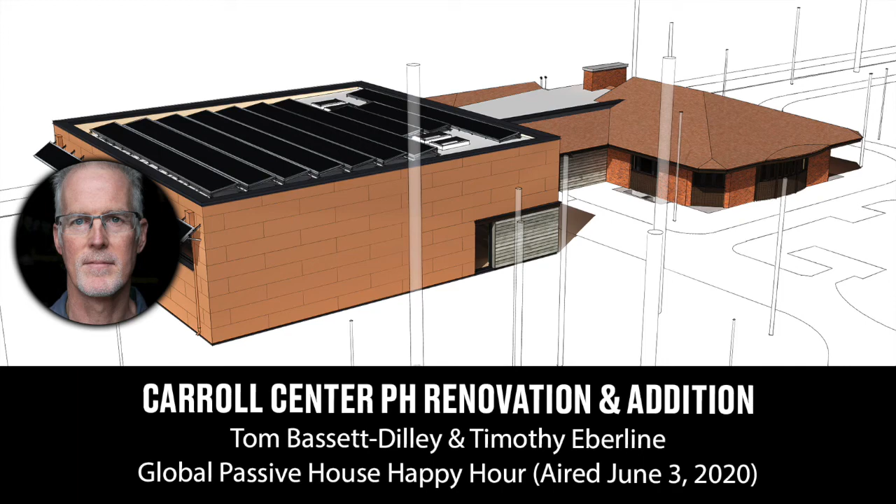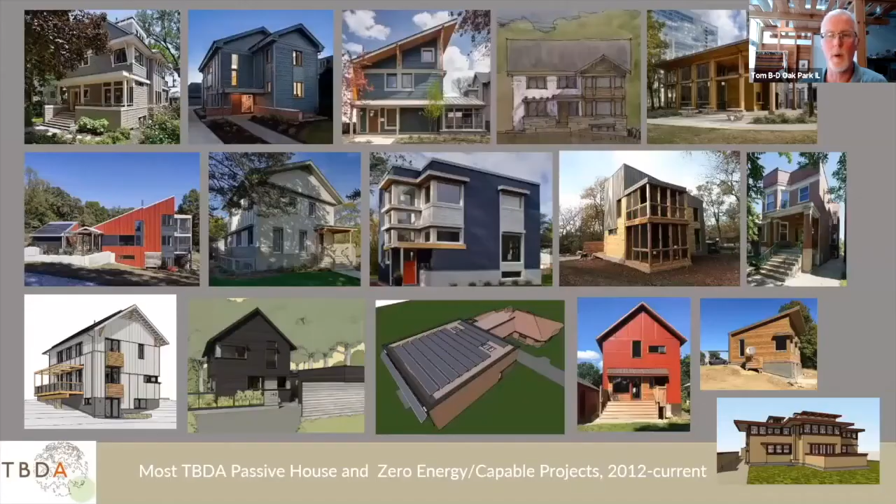So anyway, yeah, this is our kind of 2030 for 2019. We're really excited by this. We're inspired by it, and fortunately, we have clients who come to us asking for it. As a 6-person firm, it's our focus. It's what we live and breathe.

This is just a snapshot of some of our net zero and passive house projects in the last 8 years or so. The bottom right corner is one we're really excited about, which is just coming on board, a retrofit of a Frank Lloyd Wright house here in Oak Park.

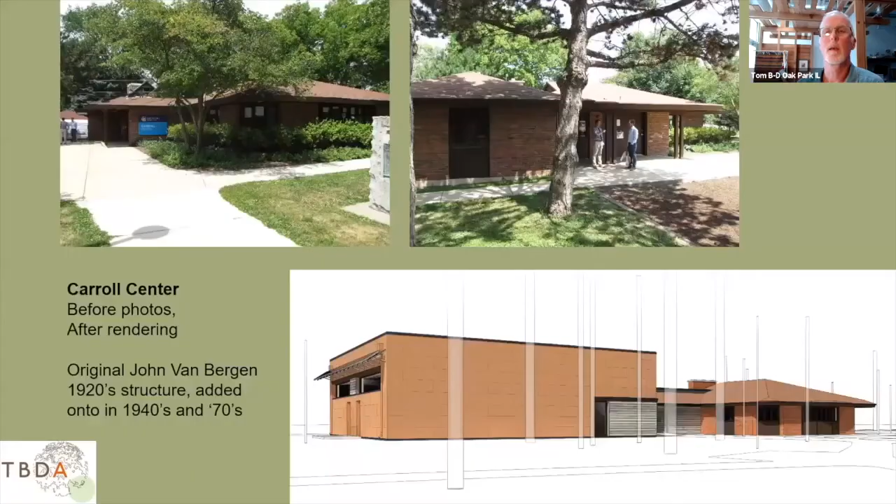So the Carroll Center is a community center in Oak Park. It's a little building that was originally built in the 1920s, designed by John Van Bergen, who was a Frank Lloyd Wright employee, and then went out on his own and did Prairie School buildings. Then it was added on to in the 40s and the 70s, so there's kind of a mishmash of things that we were coming into.

The rendering in the lower right shows the big addition off on the left there, which is our project. The owner started by saying, listen, we need an addition here, and we want to keep the budget down. So we designed a down and dirty addition, got the bid, and then they took it to the board, and the board said, yeah, but can't we do better?

Because we had done a project for the Park District 4 years before that's a near net zero project that the community loves and the board is proud of, we got together with the Park District again and said, hey, the Illinois Clean Energy Community Foundation grant might be the ticket here.

This is a pretty amazing incentive program we have in Illinois, because ComEd, the big utility, sold a power plant and had something like $225 million that had to go back to the public. So they did it via this endowment that funds more energy efficient design.

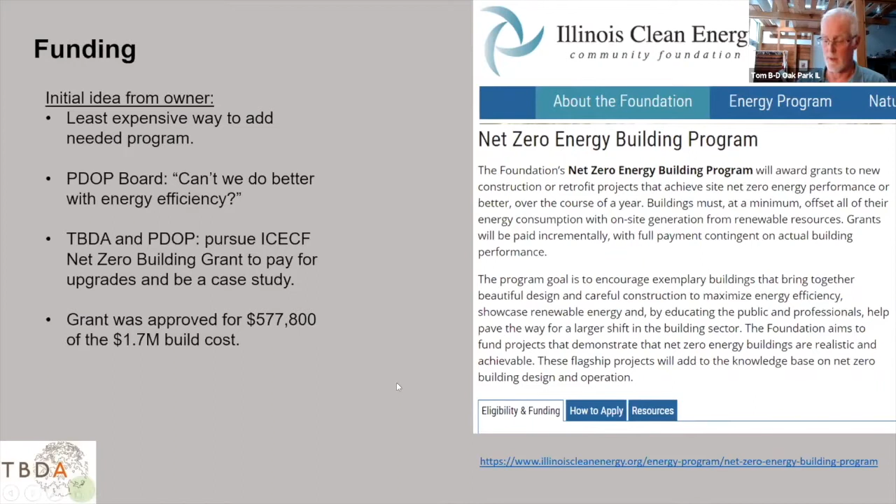So anyway, that was a big deal. This is a quick orientation here. On the top is the existing zone of the plan, and on the bottom with the black poché is the new section.

Oak Park has got more young families moving in. There's more kids. We need more after-school programming space, and we need more daycare space. The Park District wanted a big room where the entire staff could meet, because they don't have any facility big enough to have their entire staff. That's what this big addition was about. That's why the ceilings are as tall as they are, because they have kids in there running around throwing balls and stuff after school, and that's why there aren't a lot of windows down low.

And then there's a movable partition down the middle so they can divide it up in the day for daycare.

So the total ICFA for the project, the conditioned floor area per PHIUS, is 7,667 square feet. But the envelope to ICFA ratio is about 2.7. It's kind of a sprawling building, so that's a little challenging in terms of energy modeling, as we know.

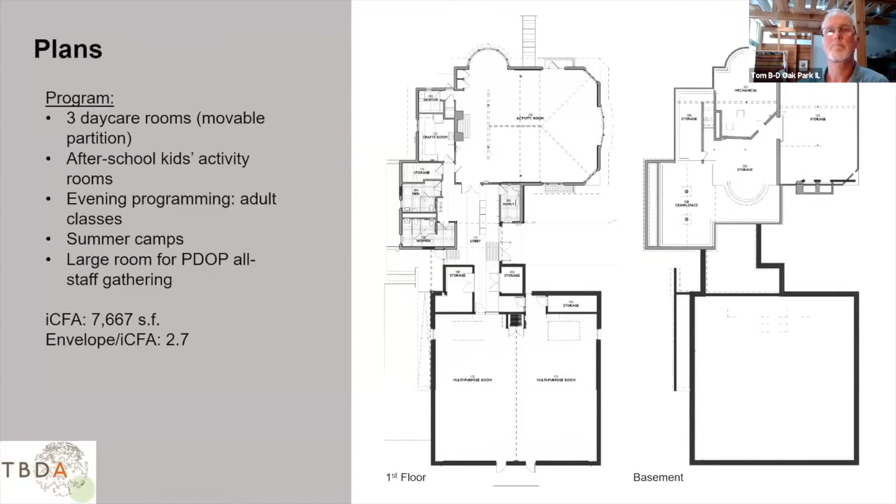So this is how we did it. The new construction is basically concrete block, painted on the inside. Simple, cheap, durable. And when you think about the perfect wall from Building Science Corp, this is pretty close to that, isn't it?

We've got an air control layer on the outside of that, which is the fluid-applied, the orange stuff there. That's a Prosoco Cat 5 membrane, which Timothy will talk about in detail. He still has it, I think, in his clothes. It's still on my coat.

And then we've got our thermal control layer outside of that, which is 6 inches of mineral wool insulation. And then we have our water control membrane on the outside of that, which is the siding. Although the Cat 5 is acting as basically our drainage plane, we're flashing all the windows to that. And then we're wrapping up and over with our air tightness.

We put a piece of Zip R, which is an insulated sheathing board, on top of the top course of block. And we basically extended our air tightness over the top of that and down, and our roof membrane is our airtight layer for the roof.

And so that's fairly straightforward, I think. Having done a number of passive projects, there were details to work out, like at the sill, which was kind of tricky with moisture and whatnot, but we did it.

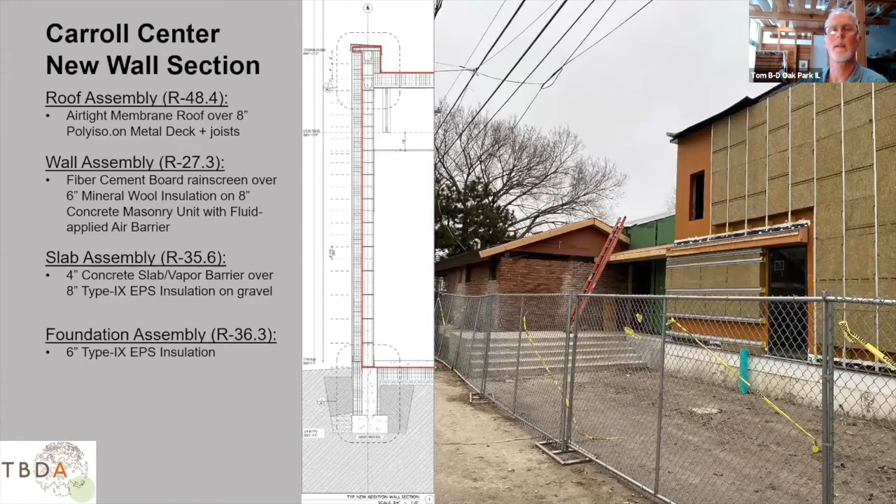And then on the retrofit, it's kind of a different story. And I just want to go into this saying, like what somebody else said earlier, we've done a fair amount of these, but I definitely don't feel like we have all the answers. I think that we have a lot of gumption, which I think is equal parts bravery and dumbness or something. It's like a fearless willingness to go and do things and try them out.

And we have made some mistakes, and I have presented to the Passive House conference about some of our mistakes and what we've learned. So hopefully we're not making too many mistakes here. We go to Building Science Corporation and all of you people in the community to learn and try to avoid it.

But on the retrofit side, we initially went into this trying to figure out if we could do it with cellulose, and realized pretty quickly that we had so many ins and outs that we decided we would retrofit this with spray foam.

And so we sistered the rafters, which are 2x4s, with 2x8s. That allowed us to straighten out the ceiling and account for the deflection, leaving the deflection alone in the rafters that are there, sister on. That gives us over 8 inches of closed cell.

And then the wall assembly, we cross-furred. So on the inside face of the 2x4s that existed, we put horizontal 2x2s at 24 inches on center. That gives us something to attach the drywall to, but it breaks the thermal bridge, it creates a thermal break, so the studs aren't coming all the way through. We got a 1.5 inch cover over them.

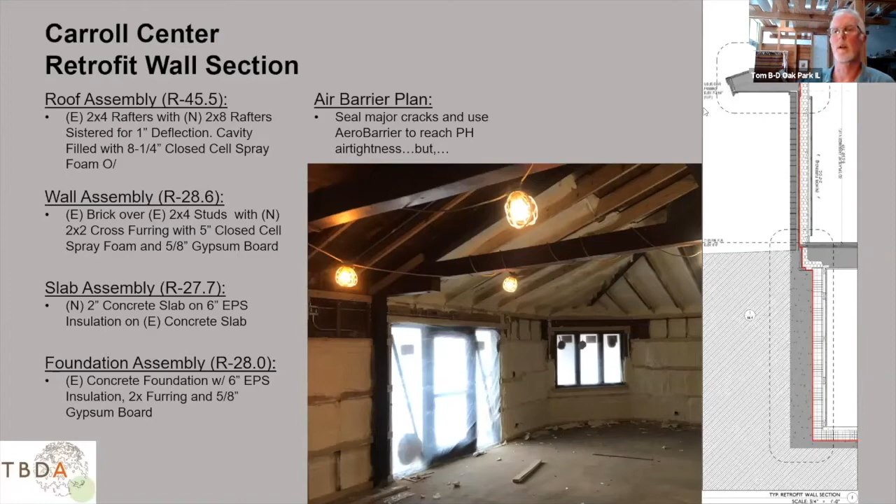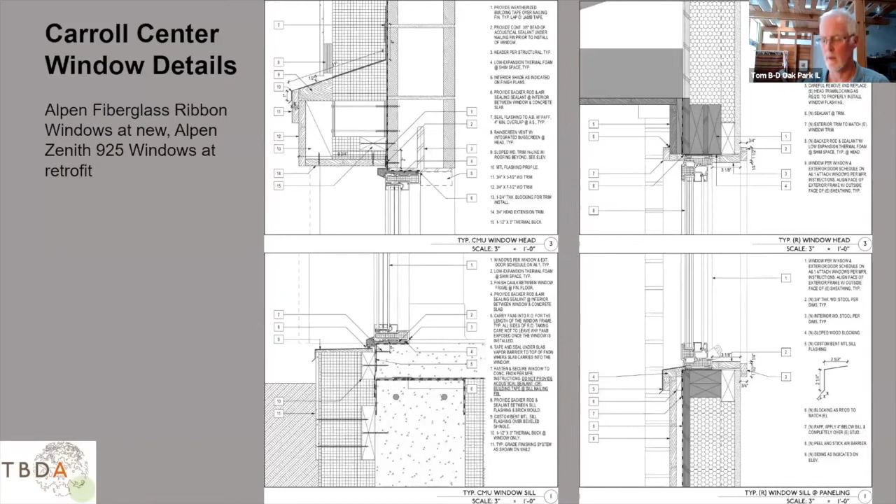I'm going to move quickly here. These are window details we can come back to. We used Alpen windows both in the new and existing construction, different ones based on what we needed. For mechanical systems, we used a geothermal, or ground source heat pump. It has a high COP, which is nice.

And that lets us do all the heating and cooling with our ground source. Ventilation is with the RenewAire unit, our energy recovery ventilation. Domestic hot water is very limited—there's just a couple of bathrooms that aren't used a ton, so we just use a simple electric water heater for that.

And then we need to get to zero energy, right? So we put a huge array on the roof, and our client Chris—he's an absolute hero in the village and region, outfitting the Park District with solar for years. We're actually going over and above what this building needs, because with that grant, we've got to hit 100% or we don't get the last 40% of the money. But by overproducing a little bit, we're also working out an arrangement with ComEd to see if we can treat the overproduction as community solar, basically.

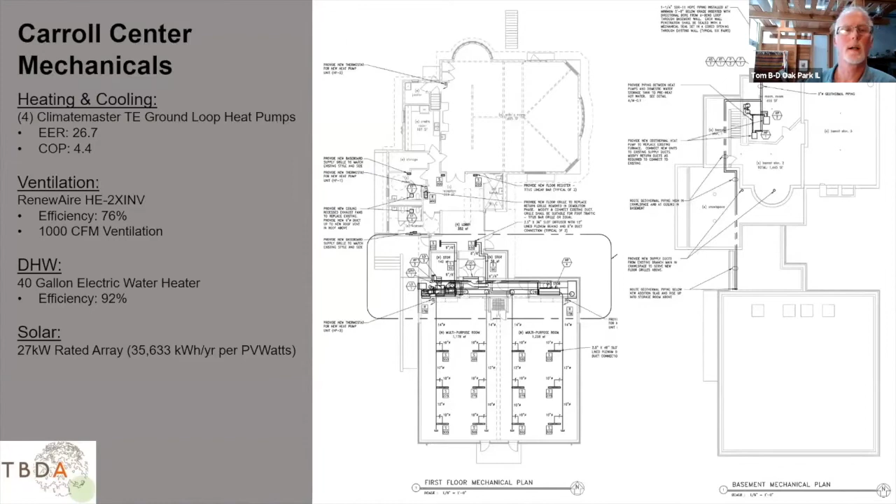So anyways, it's a 27 kilowatt rated array. It's a bunch of power, 79 panels. You'll see them here in a second.

So here's WUFI Passive. I'm not going to delve into this too much—pretty complicated utilization pattern. We had to get in there, all the kids at different times and adults at different times, evenings and weekends. What we learned from our previous project with Park District is that, as we all know, there's no such thing as a net zero building, just buildings that are used to be net zero. So you have to really be careful about your utilization and be conservative when using the building, or else you could throw that off.

You'll notice the one red X on heating demand. This was one of the last projects allowed to have that—I think you need all green check marks now with 2018—but we were allowed to have one that didn't quite meet the heating demand, and this sprawling building definitely made that a big challenge. So we got pre-certification on my wife's birthday in 2019.

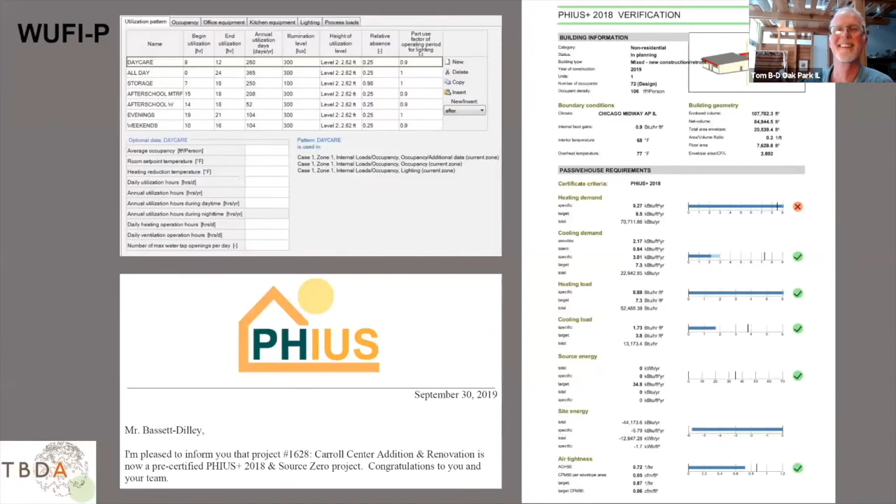Nice birthday present. All right, now we're going to dash through some construction photos.

I'm going to turn it over to Timothy to take you through, because I should say before we do that—the Park District, we went out for bid for this, and we got those kind of 'oh my God' bids, and they asked us to construction manage it. We said, well, we haven't done that before, but we'd love to because we've worked with you a lot and have a great relationship. We negotiated how that would work and what we would and would not do—we're not taking builder's risk insurance, et cetera, but we're lining up the subs. And then what happened was Timothy became the instrument to this being a successful passive house project.

By looking out for all those details that so easily can get missed, particularly the air barrier. Timothy's training is in architecture, but he's one of those rare individuals that goes very smoothly into the field and into the office. So anyway, Timothy, take it away.

Thanks, Tom. Just on that note, I want to take a quick moment to shout out to Chris Lindgren. Every great project starts with a great owner, and Chris, it's been great to work with you in the Park District of Oak Park. Thank you for being an advocate for causes like this, where firms like TBDA can build great projects. So Tom did a great job breaking down the nuts and bolts of the drawings of the project. We're going to dive into some of the construction photos.

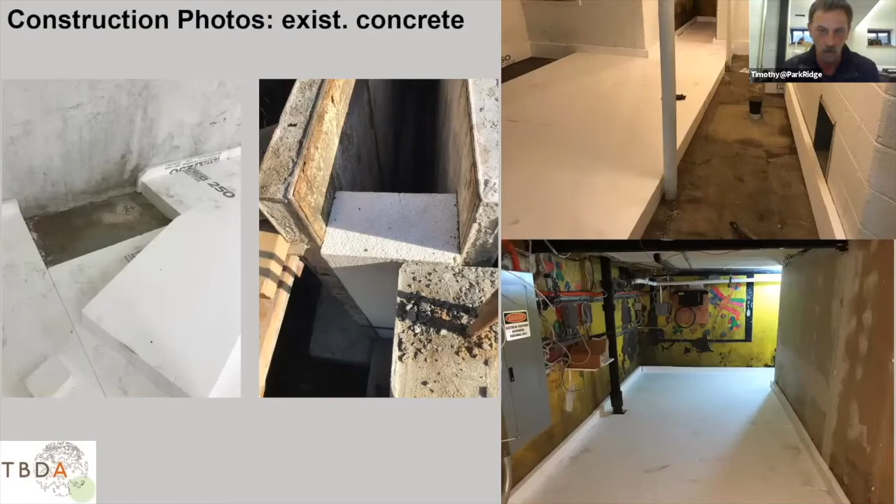In the middle, you can see a photo of insulation preventing a thermal bridge—that's an exterior uninsulated foundation retaining wall at the intersection of our building. So it becomes very critical when the concrete guys are pouring to have all that foam on site and make sure it's all there, because if it's not there, the thermal break isn't happening.

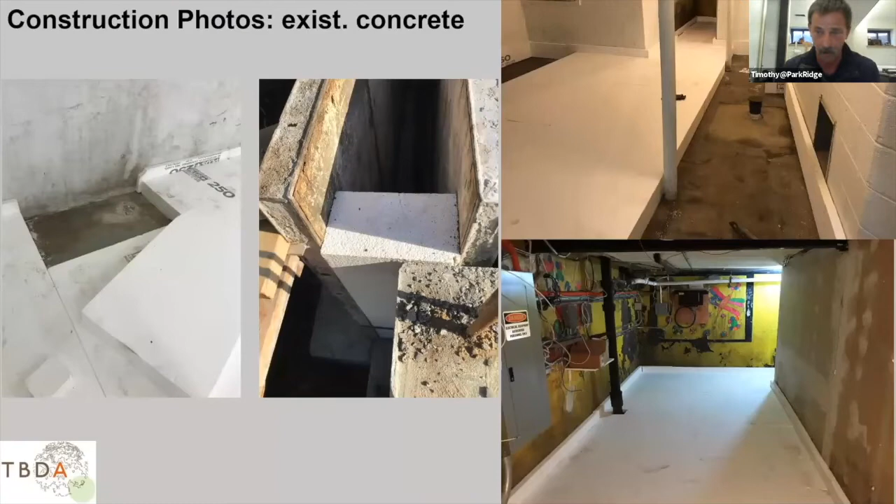This is just a few more photos of the foundation. One of the important parts of the foundation is the peel and stick membrane on top of the foundation wall, which is the capillary break. A lot of you know that the capillary break is very important. There are different locations where you can put it, but in this particular project, we did it on the top of the wall.

Another contractor did that portion of the work. I did not do that part, but after it was done, the air barrier work came down to me and Chris Lindgren of the Park District. You can see the worker applying the damp proofing, which worked as the essential preliminary adhesive to keep the exterior insulation on the wall.

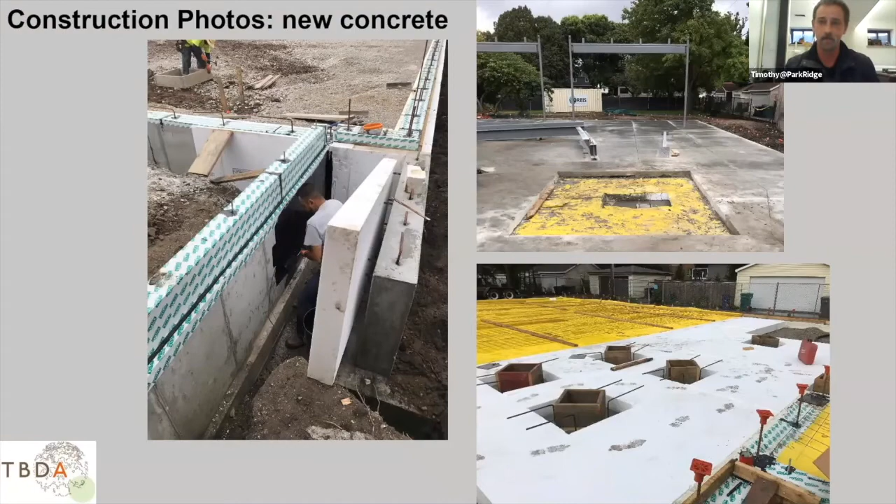In the other photos on the right, you can see there was actually a pier that wasn't located properly, so we had to cut back to the control joints and make sure it was positioned correctly. I located it properly with the concrete contractor that morning, but when I came back, he had fallen back to an old set of drawings. Things happen in construction, but the point is we got past it. It got insulated properly, the Stego wrap was continuous, and life goes on.

Tom started to talk about this before, but I think it's of interest to some of you. When Tom first approached me about being the construction manager for this project, the thing I was most scared about was the air barrier. I've worked for him long enough to know that consistency in the air barrier is important, along with consistency in insulation. But on an existing building like this, we're stuck with a bunch of conditions we have to deal with.

Originally, the air barrier strategy was to use an aerosolized product called AeroBarrier. I met with the local representative on site a few times and talked it through. He let me know that because AeroBarrier is a proprietary product, it's very expensive based on the amount of product used to fill the gaps. With the shiplap sheathing on the walls and roof of this building, the amount of material needed to fill all those gaps was going to be astronomical, so we had to do something we don't like to do.

I've learned working for TBDA that Tom never really likes to use closed cell spray foam as an air barrier, and in this case we really didn't have much of a choice. Doing a building like this is partly about education and seeing how things work. We moved forward, talked it through, looked at R-values, talked to some other consultants, and decided against using AeroBarrier because it would have been too much of a change order for the client.

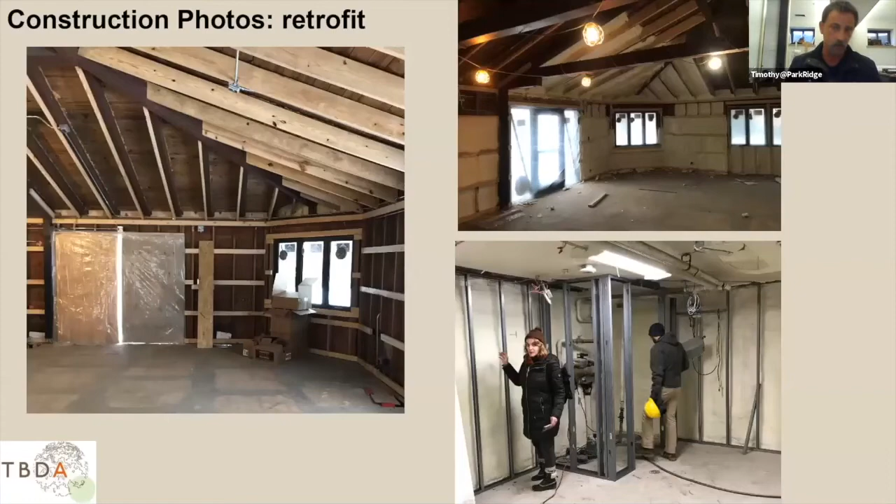These are a few photos of the frame connection of the old and new. It's a great concept, because one of the great things about this project is that not only are we preserving an old building worth preserving, but we're literally branching out and attaching it to a new structure. Mostly the idea of the new framed connection was it's a zip sheathing air barrier.

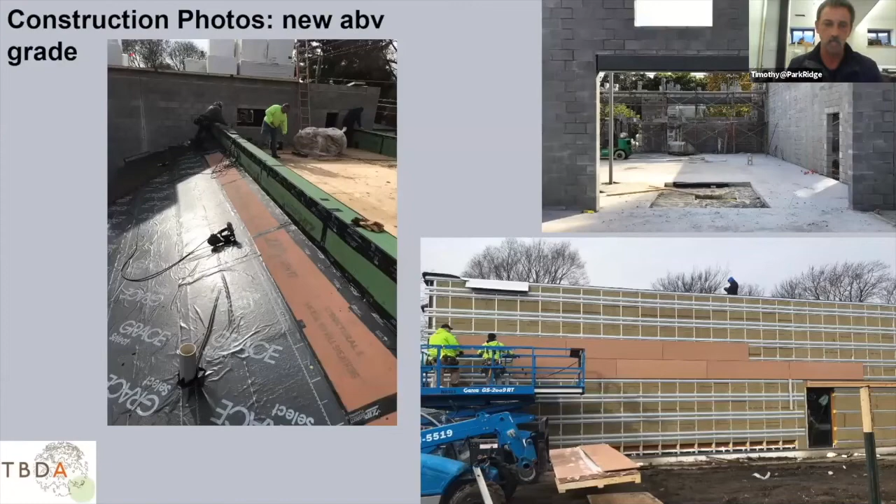Zip sheathing is great to work with. You can see a bunch of the tape there, but they also have a great liquid zip product, which came in very handy on this project. The other photos show the connection to the rough CMU box - we'll get into photos later of how we dealt with the air barrier there. Then near the end you see them putting the final cement board panels over the horizontal hat channels, over the Cascadia clips with the Z's on the exterior insulation. So you're starting to see the building take shape there.

This is just a bit of a breakdown of some of the trials and tribulations of trying to make an existing building airtight. It is doable. It's a daily battle. It's something you need to have conversations with your subs about and make them aware of - I need to do this before you do that, because if you do that before I do this, I can't do this.

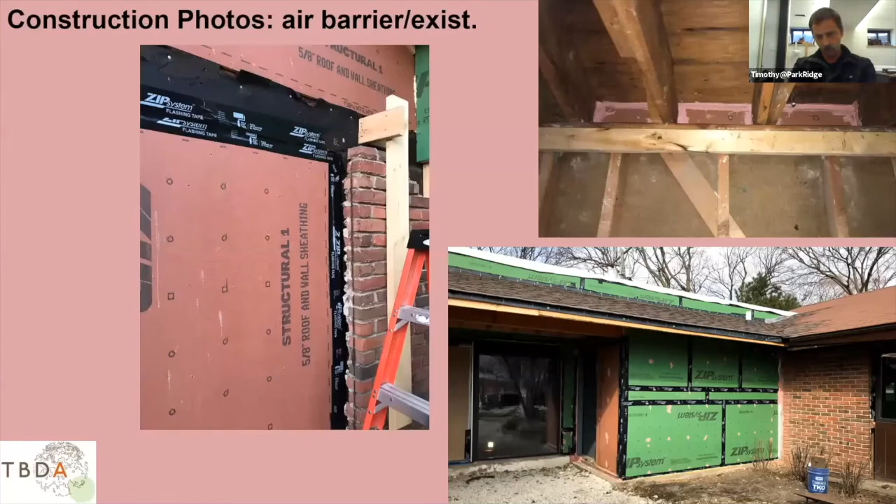This is Chris Lindgren. I know you're smiling right now. Another shout out to Chris.

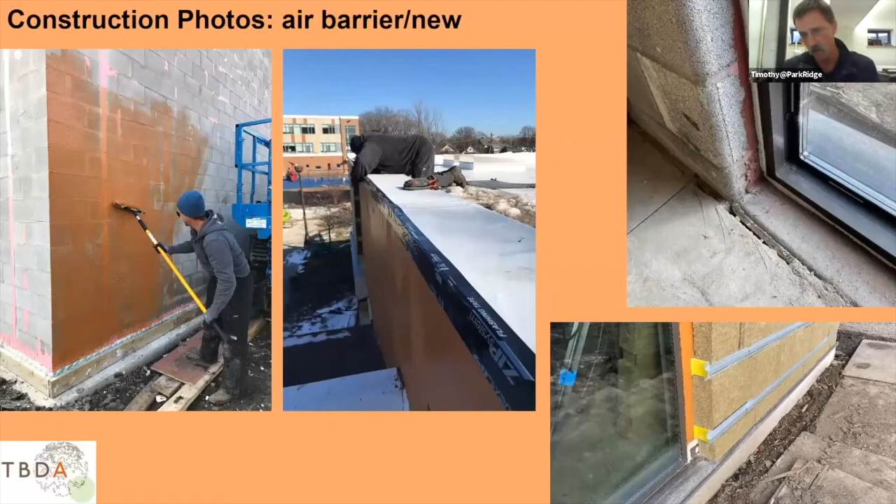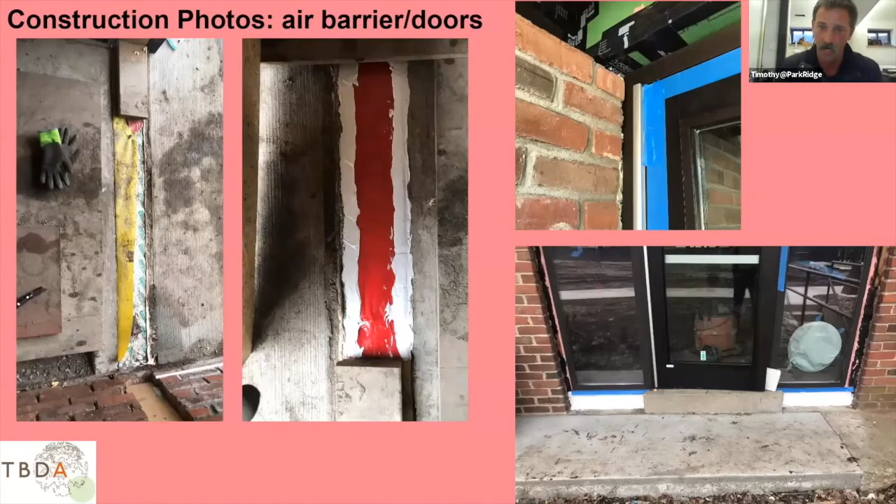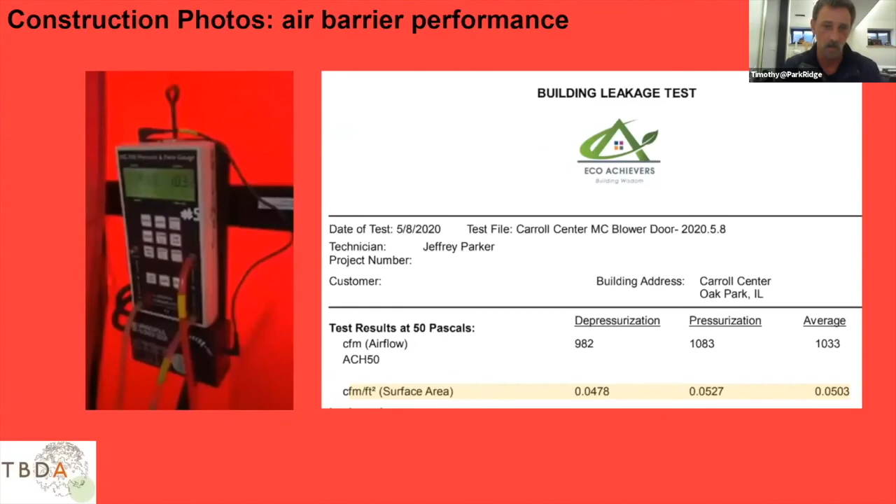We made it. This is one of the better days on the project. I have to admit, I lost sleep before we got this first blower door test. There's just no way of knowing as you're working through construction. But anyway, we hit our targets without having to use the aero barrier. That was an amazing day based on all the hard work on a daily basis that we did to get the air barrier to work.

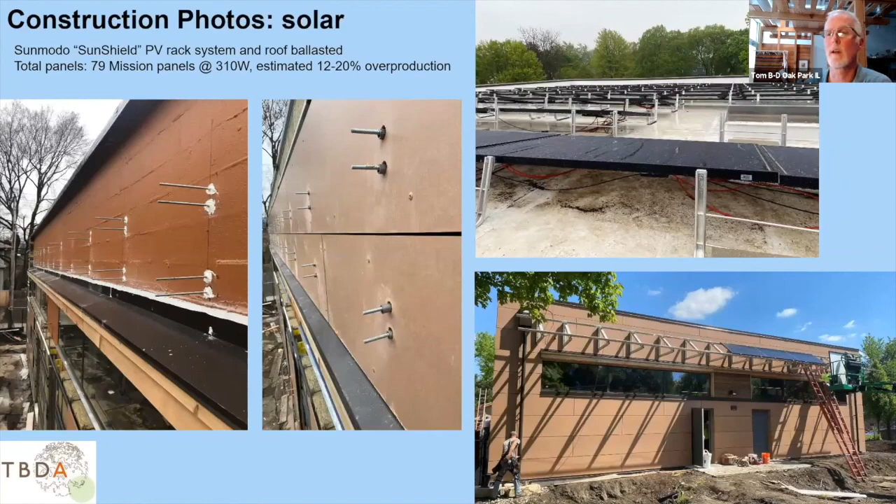I'm sure we're over 15 minutes, but that's it. They didn't cut us off. We made it.